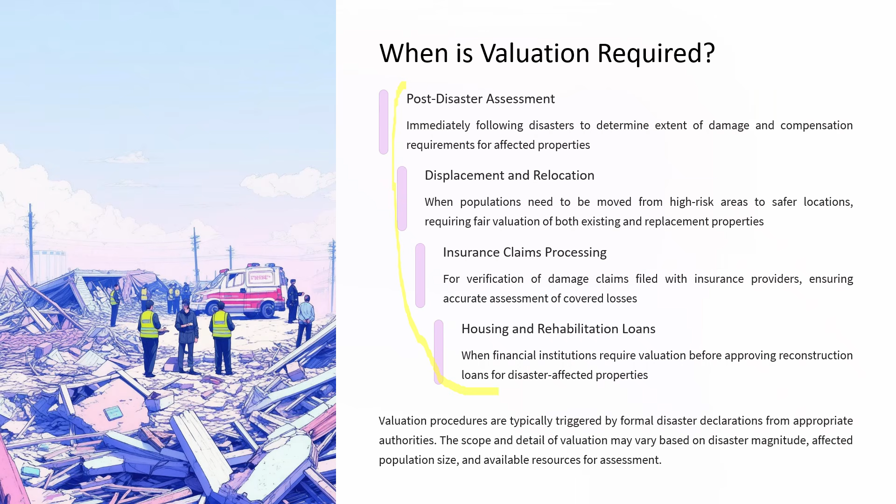Valuation procedures are typically triggered by formal disaster declarations from the appropriate authorities. The scope and detail of valuation may vary based upon disaster magnitude, affected population size, and available resources for assessment. The basic things are already known to you, but again we will be repeating the basic things which you must know as a valuer.

First, whenever you do valuation, whatever type of valuation it is, you have to find the fair market value of the property. The same thing applies here. Your approach is to find the fair market value. So the NDMA guidelines recommend using the pre-disaster fair market value.

See here, you have to find the pre-disaster fair market value as the baseline for land valuation, adjusted for disaster impact factors. So the approach considers recent transaction prices of comparable land, government circle rates for the location, and income potential of the land. So first thing is based upon these things, and then you have to consider land use.

So what type of land use to which the property or the land can be put to. So we must take into account the officially approved land use classification which significantly impacts value, whether it can be used for residential, commercial or agricultural, or it can be converted into other asset classes. So you have to take into consideration whether it falls in special economic or industrial zones, or whether it has a restricted use due to environmental regulations.

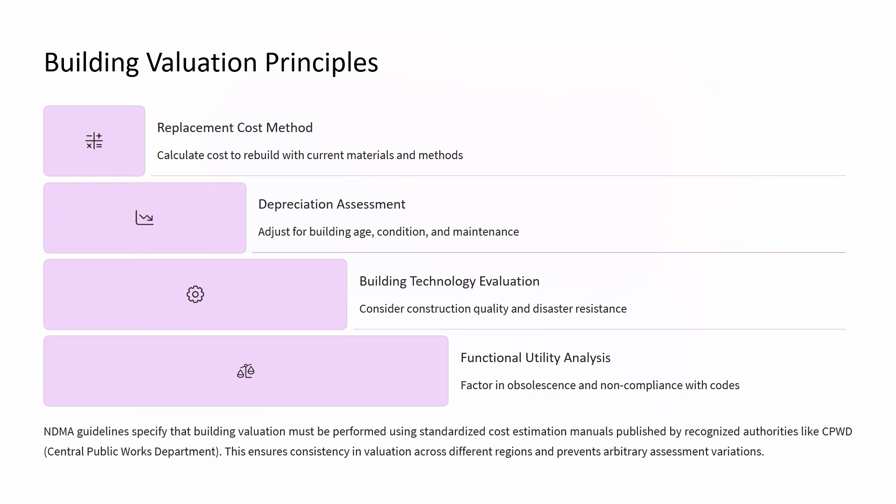So the NDMA guidelines specify that the building valuation must be performed using standardized cost estimation manuals published by recognized authorities like CPWD. This ensures consistency in valuation across different regions and prevents arbitrary assessment variations.

So, though the valuers have been considering the effect of environmental factors in their valuation, they hardly take into consideration the disaster-specific factors which are affecting the value of the property. So NDMA guidelines recognize that disaster vulnerability significantly affects property values. Property in high-risk zones typically faces valuation discounts that reflect increased insurance cost, potential for damage, and restricted development options. The vulnerability factors must be explicitly documented in the valuation reports.

So vulnerability assessments conducted by qualified engineers or geologists often accompany the valuation in high-risk areas, providing scientific justification for adjustment to standard valuation formulas. So you know the properties which are in Zone 5 or Zone 4, which are highly earthquake-prone areas, or there are certain areas which are flood-prone, cyclone-prone, landslide-prone, or drought-prone areas.

So you have to check whether the property falls in certain disaster-prone areas, and then you have to reduce the value of the property depending upon the effects which the building may be subjected to during some disaster. So for that you may have to take the help of some qualified engineer or geologist so that you can provide a scientific justification for the reduction in the standard value of the property.

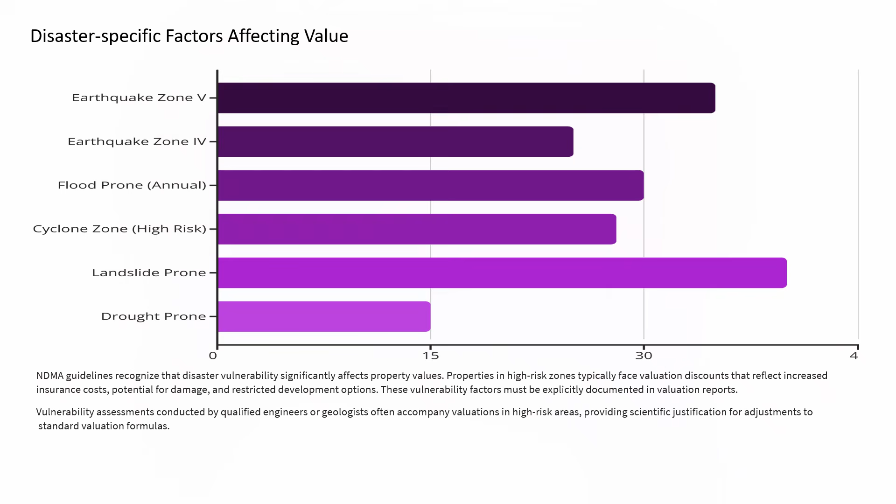So, regulatory steps for construction and valuation as far as disaster management is concerned. First thing is land clearance certificates. So obtain mandatory certification from the revenue department confirming that land is free from encumbrance and legal dispute. Then for hazard zone verification, confirm property hazard classification through official maps and NDMA zone designation.

Then secure municipal authorization confirming compliance with the disaster-resistant design requirements, and you have to check whether the person has taken an occupancy certificate before entering into the constructed house. So receive the final approval verifying the construction meets all safety standards prior to occupation. So these regulatory steps create a paper trail that becomes crucial during post-disaster valuation.

Properties without proper documentation often face challenges in receiving full compensation, as non-compliance with the building codes can be considered contributory negligence. So what happens is, whenever the bank gives a loan to a person by hypothecating or mortgaging the property or building, they generally get it insured. So many times when there are some disasters, the affected person may ask for compensation.

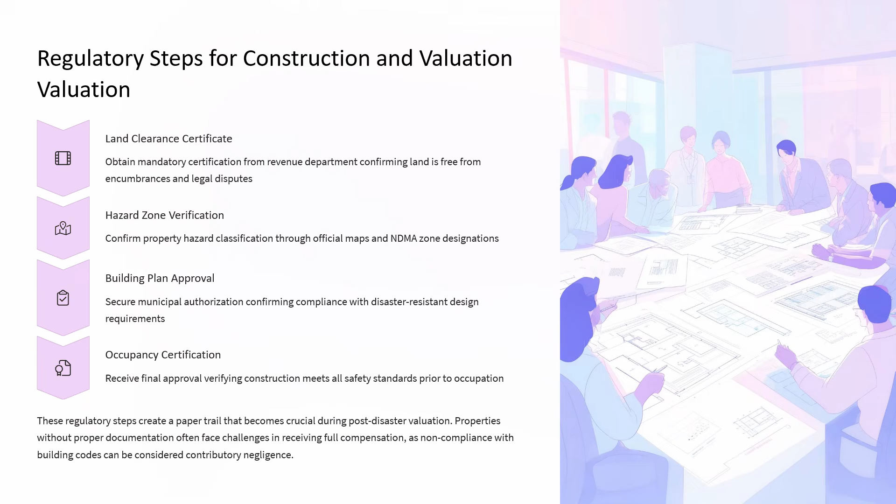So many banks have issued these instructions to the valuers to provide the specific reference about whether the NDMA guidelines have been followed or not. So some of the banks have also asked that the borrower should also submit a certificate from the civil engineers regarding the compliance of NDMA guidelines with the approved plan from the appropriate authority.

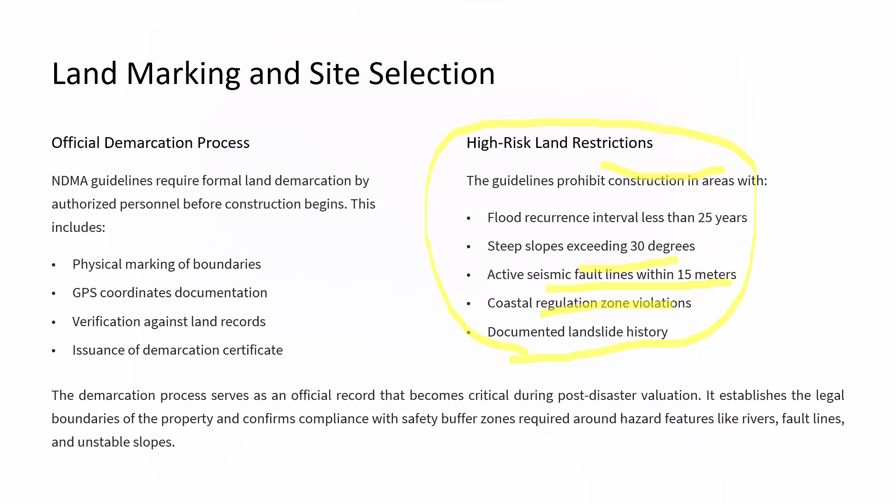Then consultation with the experts. So mainly it is structural engineers and geotechnical engineers who are expert in finding out whether the building is NDMA compliant or not. As far as structural engineers are concerned, they assess the structural integrity of the building and its foundation requirements, check whether it complies with the seismic codes, and determine appropriate building techniques for specific hazard zones.

As far as engineers are concerned, they design the disaster resistant structures, incorporating safety features, and ensure buildings meet functional requirements while maintaining resilience. And geotechnical experts, you know what they do. They evaluate soil conditions, ground stability, and potential for liquefaction or subsidence, and recommend appropriate foundation systems.

So the NDMA guidelines mandate peer review of design for all public buildings and private structures exceeding specified height or occupancy threshold. These reviews must be conducted by independent experts not involved in the original design, providing an additional layer of safety verification.

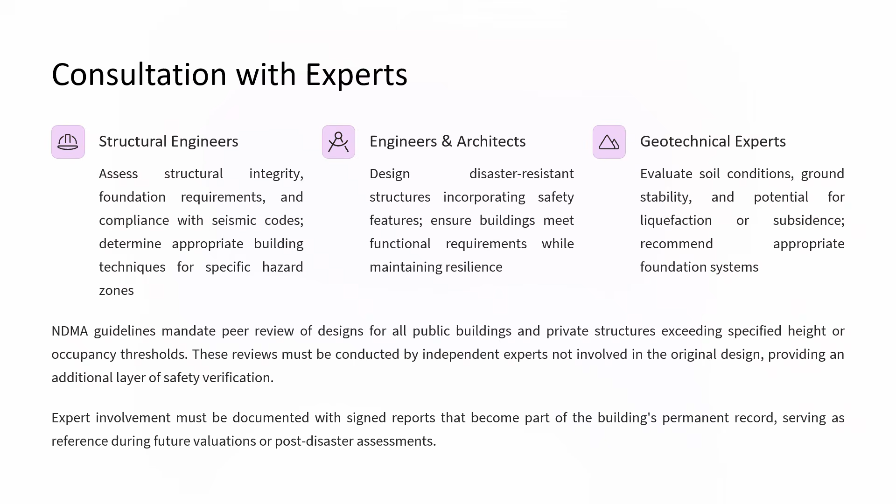So next, what are the NDMA guidelines for site suitability for construction? First, you must know the prohibited zones where construction is totally prohibited. First is active fault lines. A 15-meter buffer is required from the active fault lines before construction can be done.

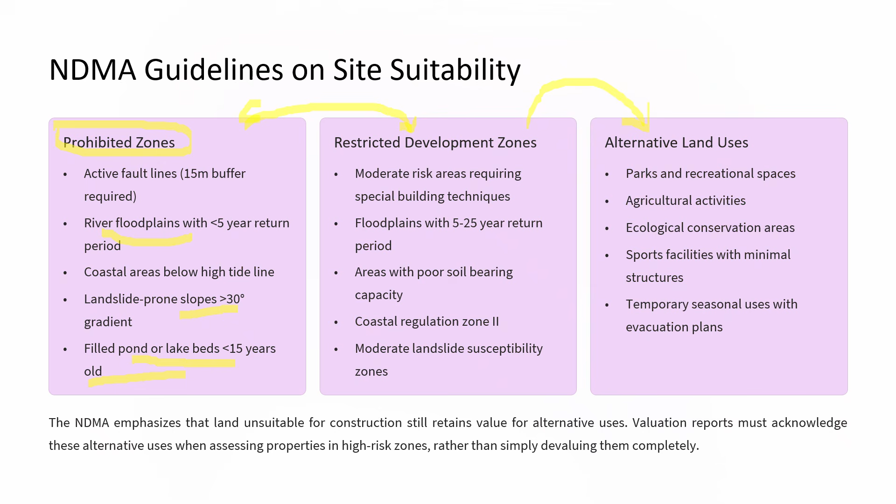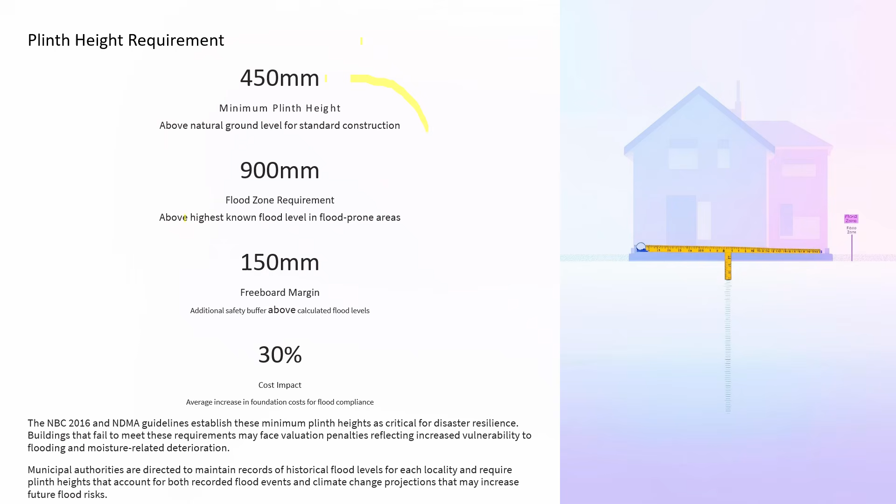The plinth area requirements as far as NDMA is concerned: the minimum plinth height above natural ground level for standard construction is 450 millimeters, and in flood zones it is 900 millimeters, and the additional safety buffer above the calculated flood level is 150 millimeters, meaning the minimum freeboard you have to provide is 150 millimeters, and it affects the cost by at least 30%. So that is the average increase in cost for flood compliance. So these are the plinth height requirements for various conditions of construction as far as NDMA guidelines are concerned.

So what are the documents required for valuations under NDMA? First, you must have the ownership documents, meaning land title deed, registration certificate, tax receipts, and mutation records, establishing clear ownership history of the property. Then you must have survey records, meaning official land survey documents, site plans, and boundary demarcation certificates stamped with GPS coordinates. Then you must have approved structural and architectural plans and modifications, if any, with official municipal sanctions. And then you must have compliance certificates, meaning building permits, occupancy certificate, fire safety clearance, and disaster resilience verification.

So the NDMA guidelines specify that incomplete documentation may result in provisional valuation subject to verification or reductions for non-compliance. So property owners are encouraged to maintain both physical and digital copies of all the documents in secure disaster resistant storage.

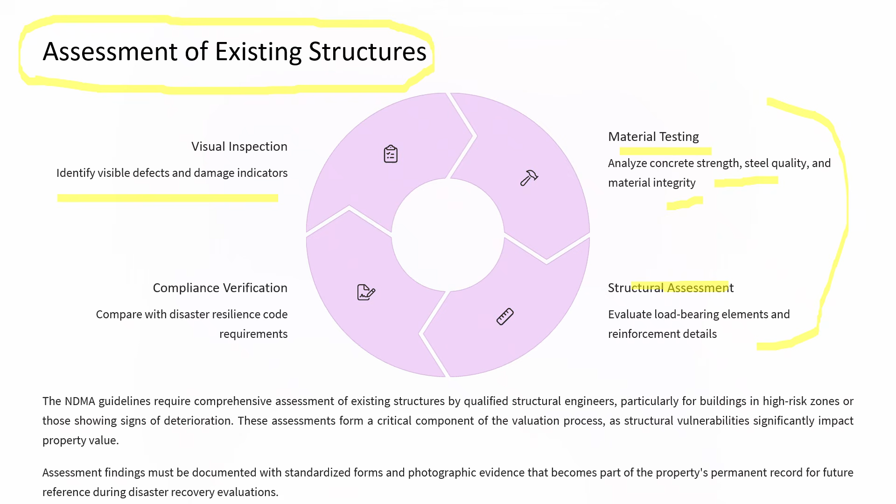Then you have to check whether the building is complying with all the bylaws, so compare with the disaster resilience code requirements, whether it fulfills them or not. The NDMA guidelines require comprehensive assessment of existing structures by qualified structural engineers, particularly for buildings in a high risk zone or those showing signs of deterioration. These assessments form a critical component of the valuation process, as structural vulnerabilities significantly affect property values. Assessment findings must be documented with standardized forms and photographic evidence that becomes part of the property's permanent record for future reference during disaster recovery evaluations.

Then, what is the role of municipal authorities? There are two types of role. One role is regulatory functions, and second, during the disaster recovery process, they have to do the valuation of the buildings or infrastructure affected by disasters. The municipal authorities serve as frontline regulators for building safety and compliance. Their responsibilities include reviewing building plans for NDMA and NBC compliance, issuing construction permits for disaster specific conditions, conducting site inspections during critical construction phases, and maintaining hazard zone maps and communicating restrictions.

Then in valuation, they have a role during disaster recovery. Municipal bodies contribute to the valuation by providing historical records of property compliance, certifying pre-disaster conditions of the structure, validating construction quality against approved plans, participating in damage assessment committees, and maintaining databases of property values for further reference. So the NDMA guidelines emphasize that municipal authorities must maintain detailed digital records of all construction within their jurisdictions, creating a baseline database that becomes invaluable during post-disaster valuation.

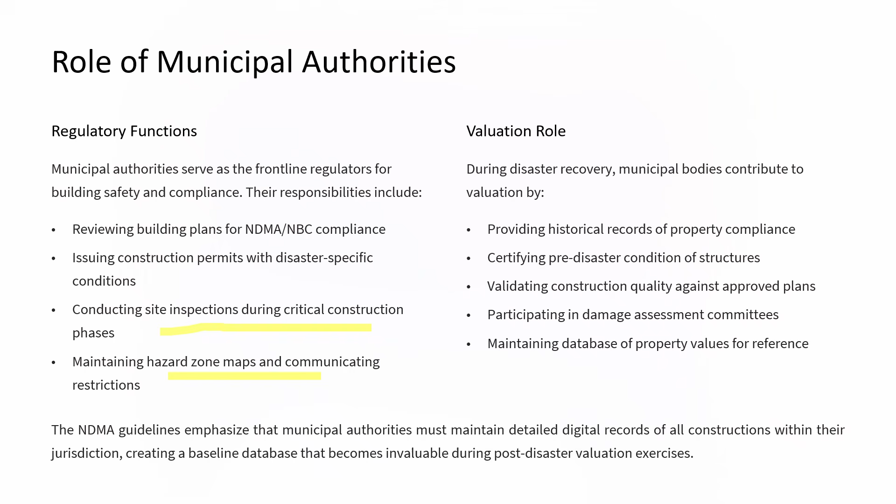Next, what is the function of project management agencies? They ensure quality assurance, they do inspection and supervision during construction, and they help in maintaining documentation. As far as quality assurance is concerned, they implement systematic quality control procedures to verify compliance with the disaster resistant construction specifications and material standards.

They also provide continuous oversight of the critical construction elements, especially foundation works, structural reinforcement, and connections. And they also help in maintaining a comprehensive record of construction methodology, material testing reports, and photographic evidence of compliance with the safety requirements.

For large-scale projects or public buildings, NDMA guidelines mandate the appointment of specialized project management agencies that act as independent quality monitors. These agencies create detailed documentation of construction quality that becomes essential reference material during future valuations. The project management agencies are required to submit standardized quality compliance certificates that become part of the building's permanent record and must be considered during the valuation process.

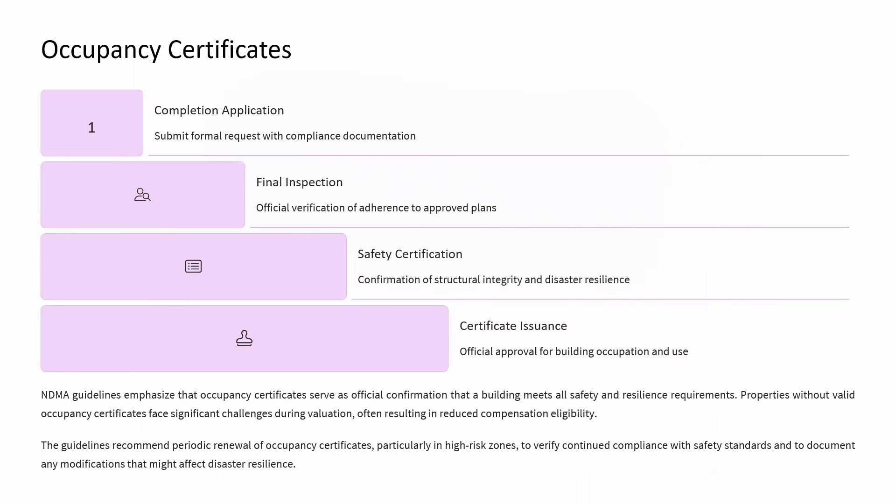Next is, what is the role of the National Building Code 2016 in the NDMA guidelines for valuation? This is a basic code which contains all the constructional details and constructional practices, and other things related to the construction of buildings. There are different parts, and some parts are important.

First is Part 2, which deals with administration and establishes permitting procedures. It defines the regulatory compliance process, outlines inspection requirements, and details occupancy certification. Then Part 3 deals with development control of buildings, which specifies front setbacks and buffers, regulates building heights and coverage, gives details of evacuation procedures, and addresses fire safety requirements of the building.

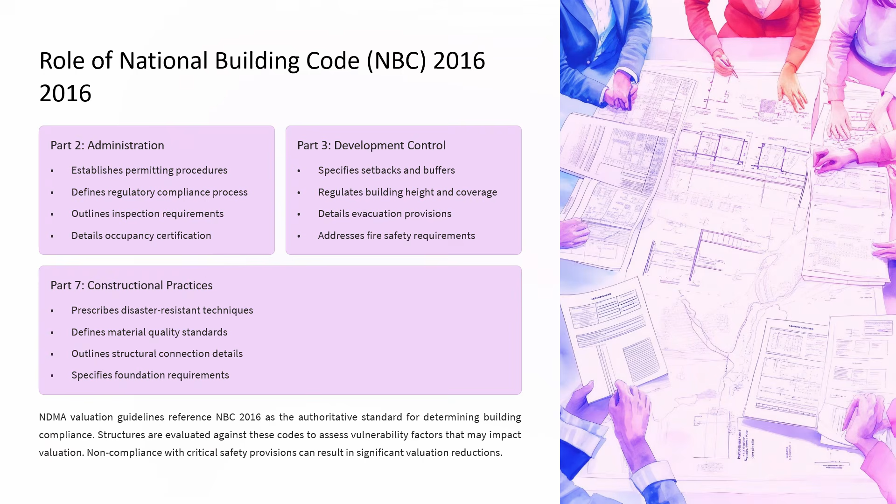And Part 7 of NBC deals with constructional practices, prescribes disaster resistance techniques, defines material quality standards, outlines structural connection details, and specifies foundation requirements. The NDMA Valuation Guidelines reference NBC 2016 as the authoritative standard for determining building compliance. Structures are evaluated against these codes to assess vulnerability factors that may affect valuations. Non-compliance with critical safety provisions can result in significant valuation reductions.

Next, as a valuer you must know that as per the guidelines, the National Building Code, or the building bylaws of the various states, the general minimum room size and circulation is as below. For a bedroom, minimum area should be 9.5 square meters, minimum width 2.4 meters, and minimum height 2.75 meters. Living room minimum size again is 9.5 square meters, width 2.4 and height 2.75. The kitchen should not be less than 4.5 square meters, width not less than 1.8 meters, and height not less than 2.75.

The bathroom should have a minimum area of 2.8 square meters, width not less than 1.2 meters, and minimum height not less than 2.2 meters. For a corridor, no minimum area is given, but minimum width should not be less than 1 meter and minimum height not less than 2.1 meters. For a staircase, minimum area is not given, but minimum width should not be less than 0.9 meter and minimum height not less than 2.2 meters.

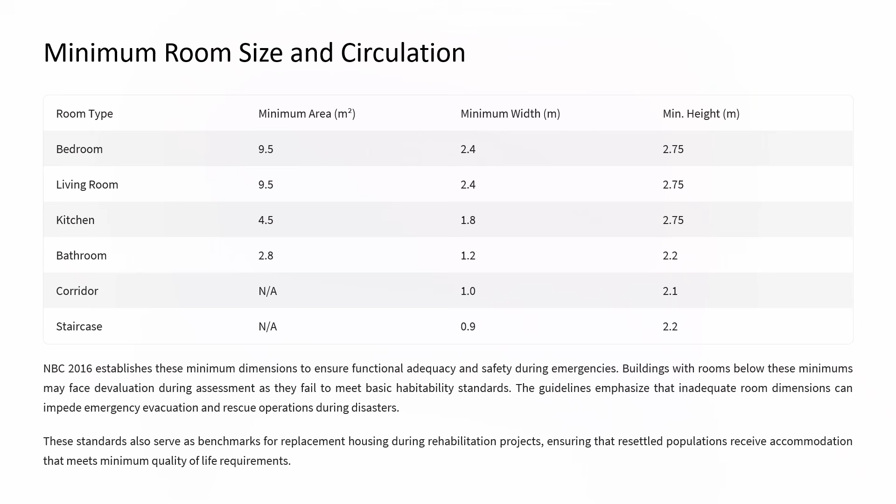Then, what should be the structural safety norms in the building? First of all, we will discuss earthquake resistance. NDMA guidelines specify zone-specific structural requirements, including reinforced concrete bands at plinth level, lintel level, and roof levels, vertical steel reinforcement at all corners and junctions, diagonal bracing for non-load bearing walls, ductile detailing of reinforcement connections, foundation ties,

and ground anchoring systems. And for cyclone and flood resilience, for areas which are prone to wind and water damage, the norms include wind resistant roof anchoring systems, water resistant foundation treatments, elevated plinth with proper drainage, storm shutters for windows and openings, waterproof electrical systems above flood level, and rainwater harvesting and drainage infrastructure.

So compliance with these structural safety norms significantly impacts valuation assessments. Buildings meeting or exceeding these standards receive favorable valuations reflecting their enhanced resilience and reduced vulnerability to disaster damage.

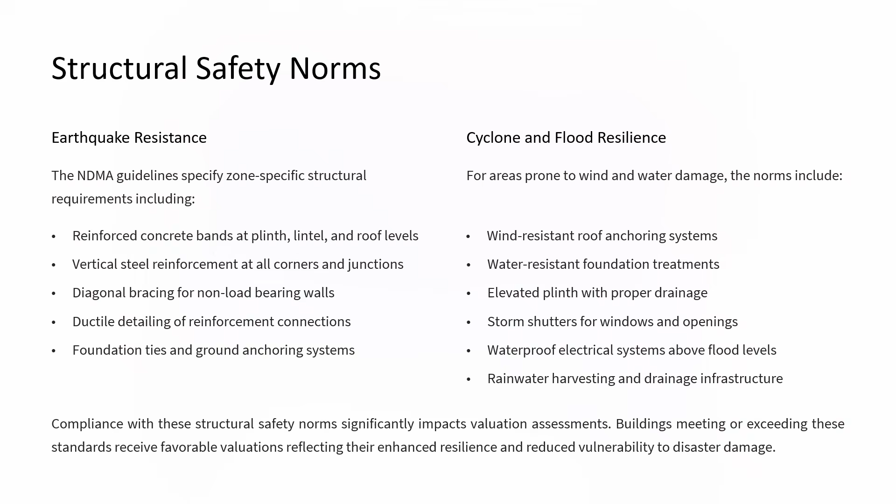Then peer review of structural design. First of all, when the building has to be constructed, initially complete structural design calculations and drawings are submitted by the primary engineers, including load analysis, material specifications, and connection details. Then these are to be reviewed by an independent expert. A qualified structural engineer with minimum 10 years experience performs comprehensive review of calculations and assesses disaster resistance.

So basically this has to be done by the faculty of IITs or NITs, who review these structural designs submitted by the primary engineers, and then the review engineer documents any safety concerns, code non-compliance or resilience weakness requiring modifications. After all the corrections have been done, upon satisfactory resolution of all issues, the reviewer issues formal certification of structural adequacy and disaster resilience.

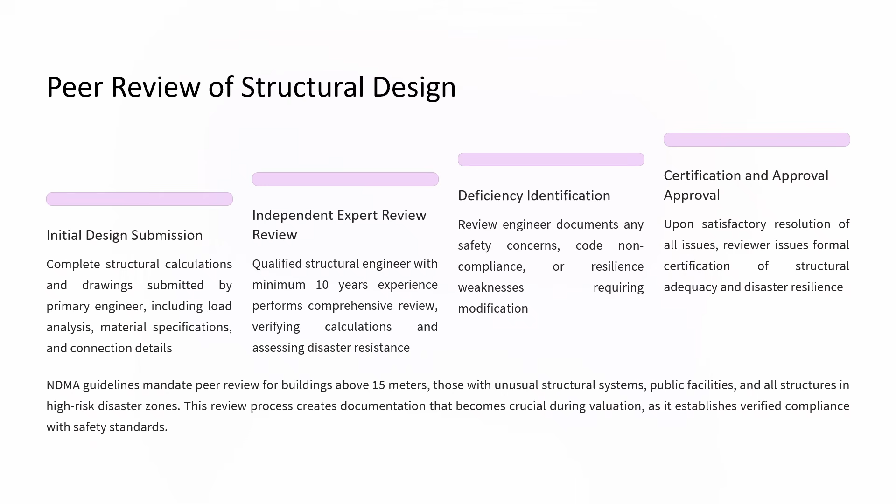So NDMA guidelines mandate peer review for buildings above 15 meters, those with unusual structural systems, public facilities, and all structures in high risk disaster zones. So the review process creates documentation that becomes crucial during valuation as it establishes verified compliance with the safety standards.

So those were the things which have to be done before the construction starts. Then during construction, what are the disaster resilient construction practices? The NDMA emphasizes that disaster resilience must be built into every aspect of construction rather than added as an afterthought. These best practices not only enhance safety but also preserve property value through reduced vulnerability to damage.

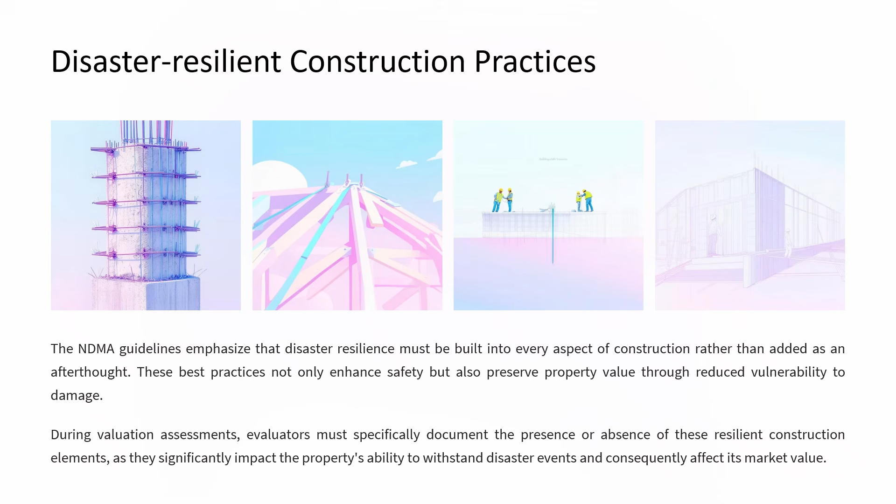So during valuation assessment, evaluators must specifically document the presence or absence of these resilient construction elements as they significantly impact the property's ability to withstand disaster events and consequently affect its market value. Then what are the technical steps which are to be taken during the valuation?

First of all, initial inspection and documentation is to be done. Conduct a comprehensive site visit, document existing conditions with photographs and measurements, verify property boundaries. Then you collect the property data: gather ownership records, construction documents, previous assessments, and historical transaction data for comparable properties.

Then you have to do hazard zone identification, which is important, and which we have been ignoring. Determine applicable disaster risk classifications from the official NDMA hazard maps and local records. Then apply the standard calculation methods incorporating replacement cost, depreciation, and risk adjustment as per NDMA guidelines.

So the NDMA emphasizes that valuation must follow a structured, transparent process that can be independently verified. Each step must be documented with standard forms that become part of the official valuation record and serve as reference for dispute resolution if needed in the future.

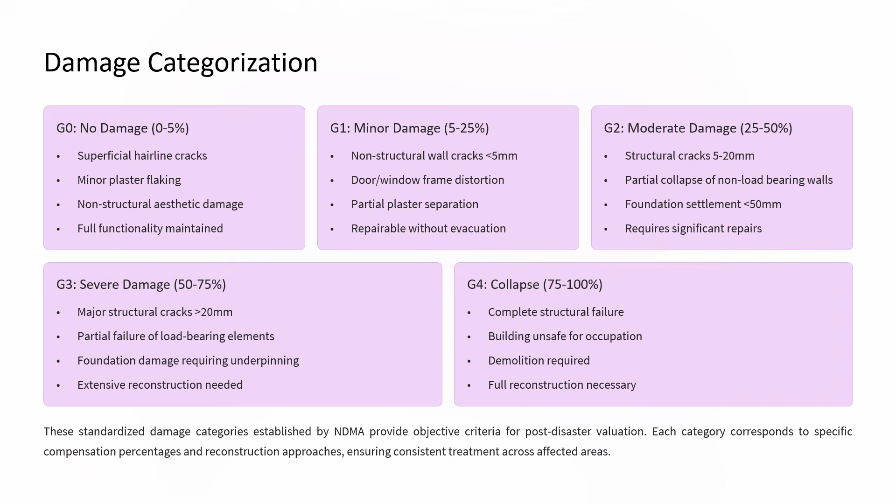So these standardized damage categories established by NDMA provide objective criteria for post-disaster valuations. Each category corresponds to a specific compensation percentage and reconstruction approach, ensuring consistent treatment across the affected areas. Then we generally use the replacement cost method for calculating the valuation of the property.

And then comes something we generally ignore, resilience enhancement costing. Add a premium for disaster-resistant features required by current codes that may not have been present in the original structure. Then salvage value adjustment: deduct the value of recoverable material from the damaged structure that can be reused.

The NDMA guideline stipulates that replacement cost calculations must reference official government rate schedules rather than market quotes to ensure standardization. Local multipliers are applied to account for regional variations in material and labor costs, creating a fair yet consistent approach.

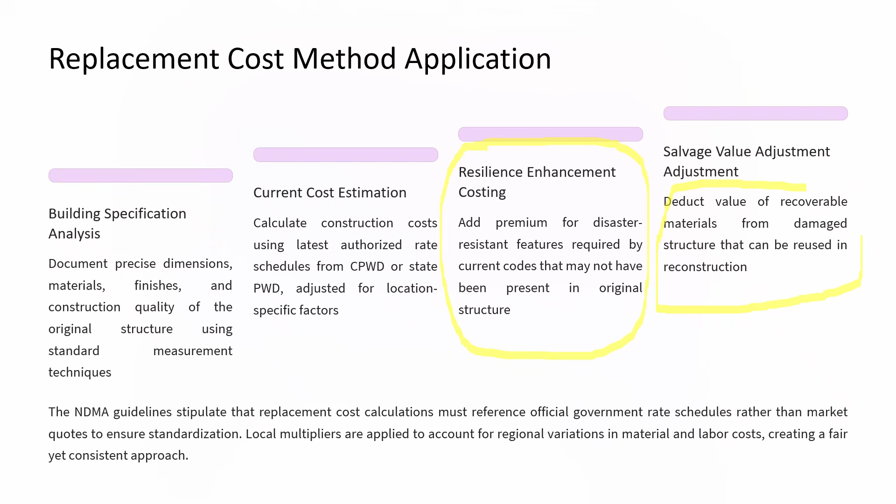Then you have to apply depreciation based upon the age. You can apply any method, straight line method, constant percentage method, or other methods for calculating depreciation. NDMA guidelines incorporate a standard depreciation schedule based on building age but allow for adjustment based on actual conditions. Well-maintained buildings may receive a lower depreciation rate, while poorly maintained structures face accelerated depreciation regardless of chronological age.

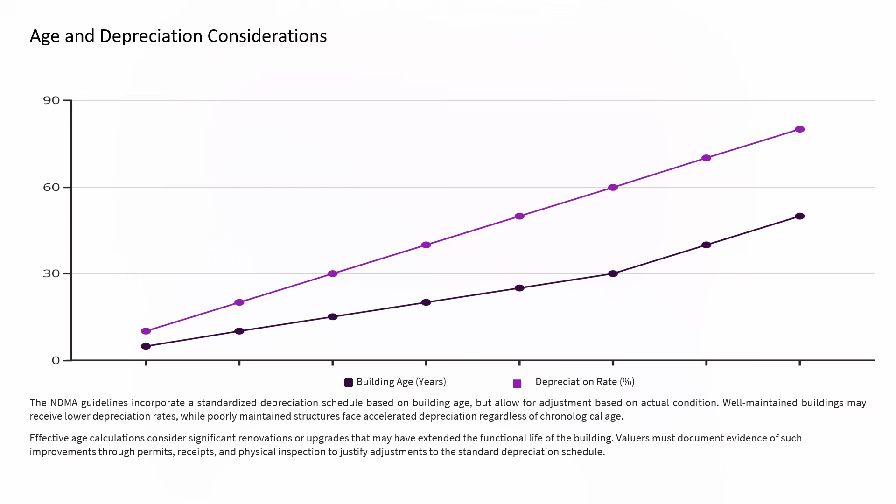Effective age calculations consider significant renovations or upgrades that may have extended the functional life of the building. Valuers must document evidence of such improvements through permits, receipts, and physical inspections to justify adjustment to the standard depreciation schedule. Now we will take examples that will make clear how the compensation calculations are done.

Suppose you have a residential building in a flood affected area with the following specifications. Built-up area is 150 square meters. Construction type is an RCC frame building with brick infill walls. Its age is 12 years. Damage is 40%, so it falls in the G2 category. Pre-disaster condition: it was well maintained. Documented compliance with the building codes is available.

Then how will you calculate under the NDMA guideline for flood affected property? Suppose the replacement cost is 30,000 per square meter. Plinth area multiplied by replacement cost, so the cost of construction becomes 45 lakh. Depreciation for 12 years we take as 25%, so depreciation is 11 lakh 25,000. With the condition adjustment for good maintenance, this depreciation is reduced by 2 lakh 25,000, so the adjusted depreciation is 9 lakh.

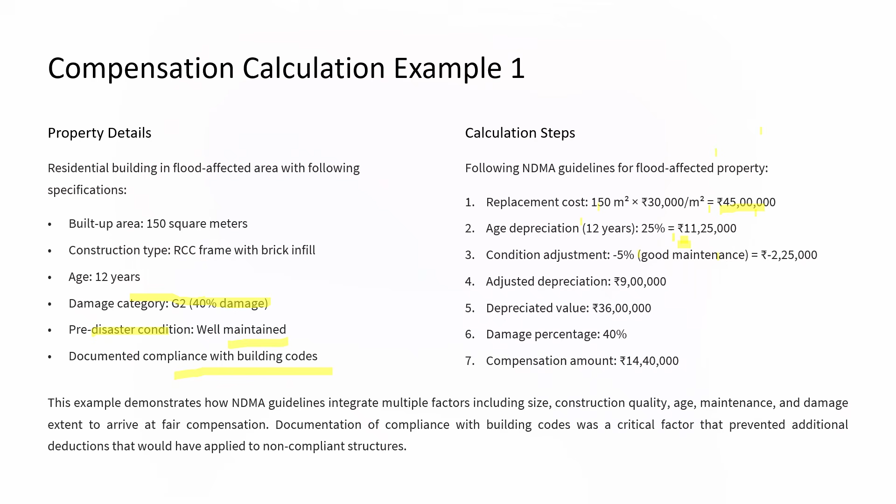So let us take another example. The pre-disaster market value of a commercial building is 80 lakh. It has been subjected to a grade G3 damage, that is serious structural damage of more than 65%. Then after assessment the compensation is calculated as 52 lakh, and then a restoration grant, additional aid for code-compliant rebuilding, of another 12 lakh is given

as restoration grant. So this commercial building suffered severe earthquake damage due to its location in seismic zone 4. The structure showed evidence of proper seismic reinforcement as per NBC 2016, which positively influenced the evaluation. The calculation followed NDMA guidelines for earthquake damage, including detailed structural assessment by certified engineers.

The additional restoration grant was provided specifically for implementing enhanced seismic safety features that exceed minimum requirements, demonstrating NDMA's commitment to building back better rather than simply restoring pre-disaster conditions. So if the owner has done all the compliances, he may not only get the required compensation of 52 lakh as in this case, he may also get another amount of 12 lakh to reconstruct the building back better rather than simply restoring pre-disaster conditions.

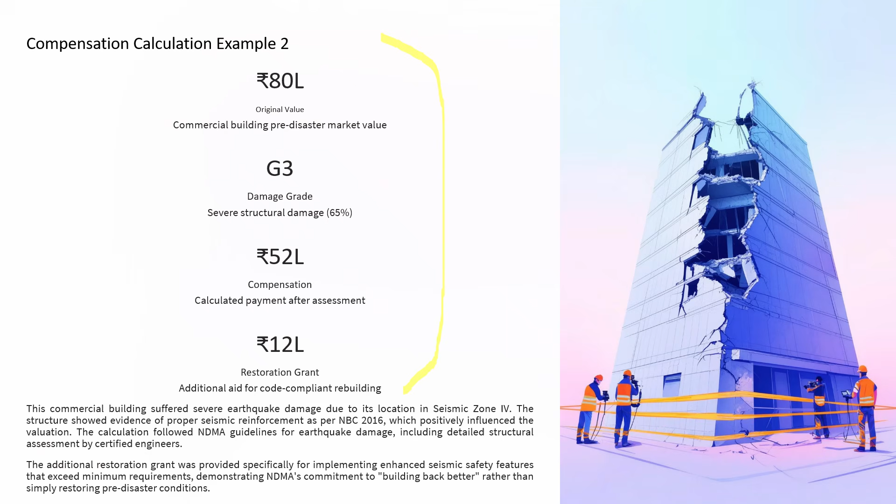So this is an important thing which you must know when you are doing valuation, which we have been ignoring so far in our day-to-day work. Then next is documentation and reporting format: what are the documents required for this type of valuation and what is the reporting format of valuation. First, you must have complete details including unique ID of the property, GPS coordinates of the property, ownership information, and pre-disaster documentation status of the property.

After getting all these documents, you have to go for visual documentation, so comprehensive photographic evidence showing the property from multiple angles with specific focus on damaged areas and measurement references. And then you go for technical assessment such as detailed measurement, construction specification, damage classification, and compliance evaluation with the applicable codes. And based upon all these things, you have to prepare a step by step calculation showing all factors considered, adjustments applied, and final determination with clear methodology references.

So NDMA guidelines mandate the use of standardized reporting formats to ensure consistency and transparency. These reports must be prepared in triplicate with copies maintained by the property owner, local authority, and disaster management department for reference and audit purposes. Digital submission of reports to a centralized database is increasingly required, allowing for better tracking, analysis, and accountability in the compensation process.

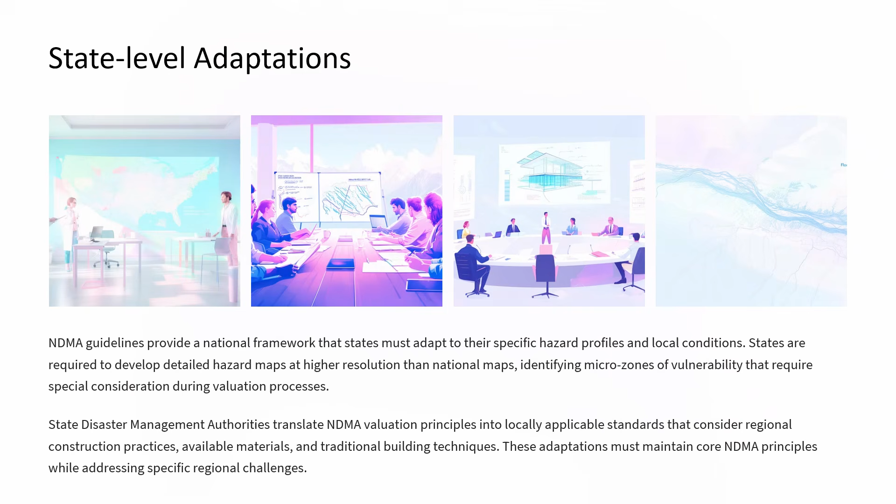Then we will discuss the state level adaptations. NDMA guidelines provide a national framework that states must adopt and adapt to their specific hazard profiles and local conditions. States are required to develop detailed hazard maps at a higher resolution than national maps, identifying micro zones of vulnerability that require special consideration during the valuation process. State disaster management authorities translate NDMA valuation principles into locally applicable standards that consider regional construction practices, available materials, and traditional building techniques. These adaptations must maintain core NDMA principles while addressing specific regional challenges.

Then training and capacity building. So now there is a need of it. A foundation 5-day training course covering NDMA valuation principles, disaster specific techniques and documentation standards is required to be done, and all the RVs can go for it and can conduct this 5-day training with the help of NDMA, so that valuation as per NDMA guidelines is done by all the listed and other valuers.

So there must be advanced training in specific disaster types such as earthquakes, floods, cyclones, and hands-on practice using standardized assessment tools. Then there should be supervised practical assessment under mentor guidance with gradual progression from simple to complex valuation scenarios. There must be continuous professional development in these areas also, which is lacking at present. Annual refresher courses covering guideline updates, new technologies, and lessons learned from recent disasters must be incorporated in the training process of all the RVs.